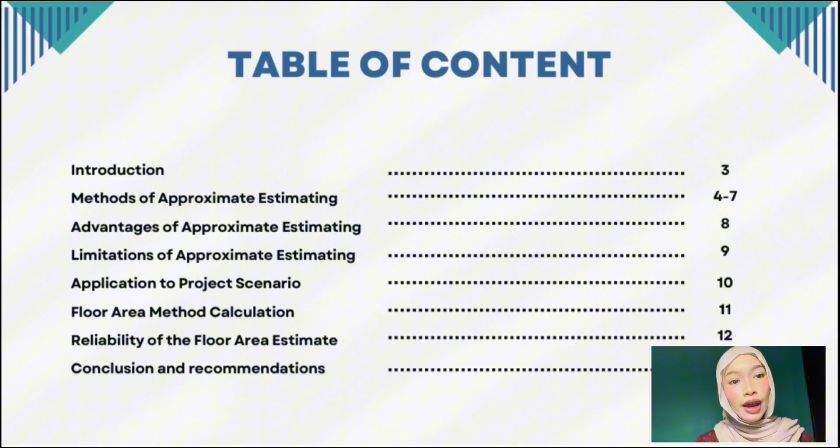Before I start my presentation, I will briefly explain the table of contents. This presentation covers the introduction, methods, advantages, and limitations of approximate estimating. And then I will explain the application to the project scenario, including the floor area method, calculation, and its reliability. Finally, I will conclude with the recommendation.

Moving on to the introduction of approximate estimating. Approximate estimating refers to the process of estimating the probable cost of a construction project during the early planning and design stage, before detailed drawings and bill of quantities or BQ are prepared. This method is based on historical cost data, standard unit rates, and similar completed projects. It helps clients and project teams to prepare an initial budget, assess project feasibility, and support cost planning and decision making.

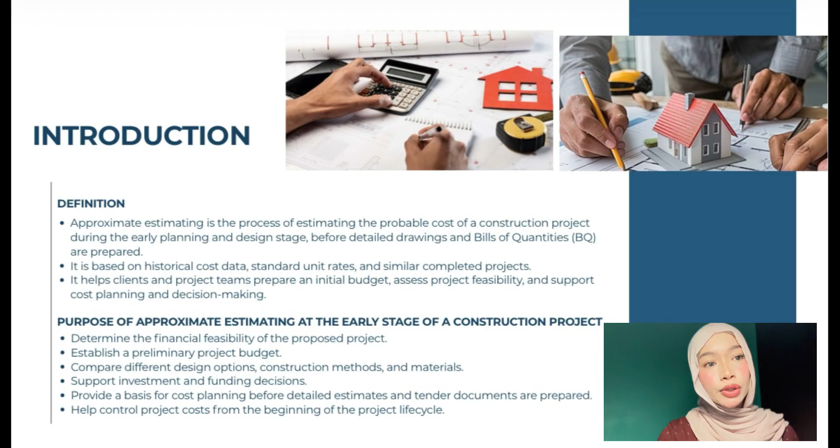The purpose of approximate estimating at the early stage of a construction project is to determine the financial feasibility of the proposed project and establish a preliminary project budget. Furthermore, it allows the comparison of different design options, construction methods, and materials. It also supports investment and funding decisions, provides a basis for cost planning before detailed estimates and tender documents are prepared, and helps control project costs from the beginning.

Following this, I will explain the methods of approximate estimating. Approximate estimating is usually carried out during the early stage of a construction project when detailed drawings and bill of quantities or BQ are not yet available. It provides a quick estimation of the probable project cost to support feasibility studies, budgeting, and decision making. There are four common methods of approximate estimating, which are the floor area method, cubic method, unit method, and storey enclosure method. Firstly, the floor area method.

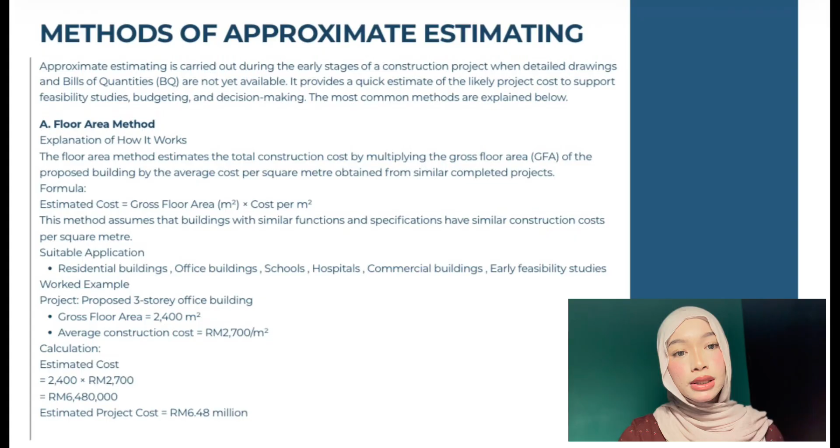This method estimates the construction cost by multiplying the gross floor area of the proposed building by the average construction cost per square meter from similar completed projects. The formula used is estimated cost equals gross floor area in square meters multiplied by cost per square meter. This method is suitable for residential buildings, office buildings, schools, hospitals, commercial buildings, and early feasibility studies. For example, a proposed 3-storey office building with a gross floor area of 2,400 square meters and average construction cost of 2,700 ringgit per square meter will have an estimated project cost of 6.48 million.

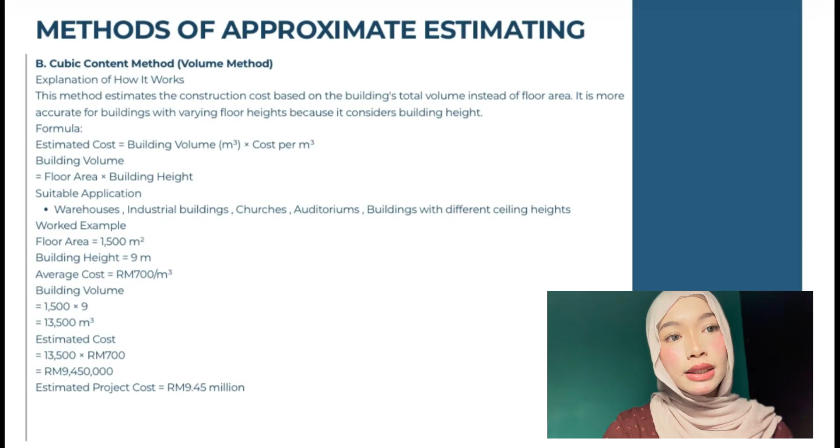Secondly, the cubic method, also known as the volume method. This method estimates the construction cost based on the total volume of the building instead of the floor area. It is more suitable for buildings with different floor heights because it considers the building height. The formula is estimated cost equals building volume in cubic meters multiplied by cost per cubic meter. This method is commonly applied for warehouses, industrial buildings, churches, auditoriums, and buildings with different ceiling heights. For example, a building with a floor area of 1,500 square meters and height of 9 meters will have a total volume of 13,500 cubic meters with an average cost of 700 ringgit per cubic meter. The estimated project cost is 9.45 million.

Thirdly, the unit method. This method estimates the project cost based on the number of functional units such as hospital beds, classrooms, hotel rooms, apartments or housing units. The formula used is estimated cost equals number of units multiplied by the cost per unit. This method is suitable for housing developments, hotels, hospitals, schools, and student hostels. For example, a proposed apartment development with 120 units and average construction cost of 280,000 ringgit per unit will have an estimated project cost of 33.6 million ringgit.

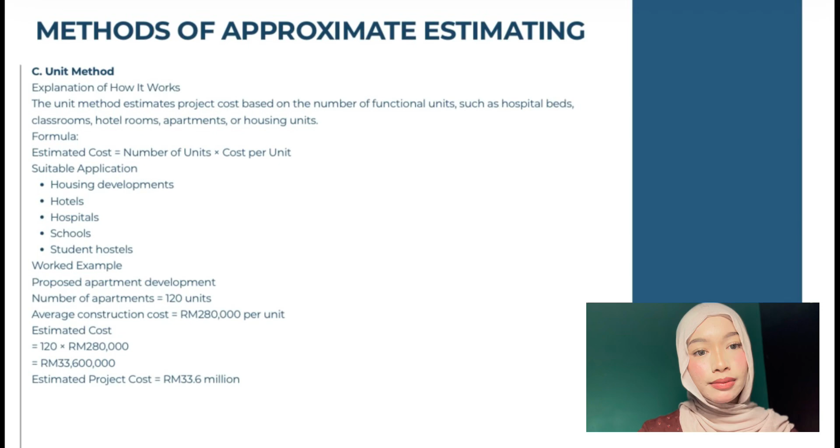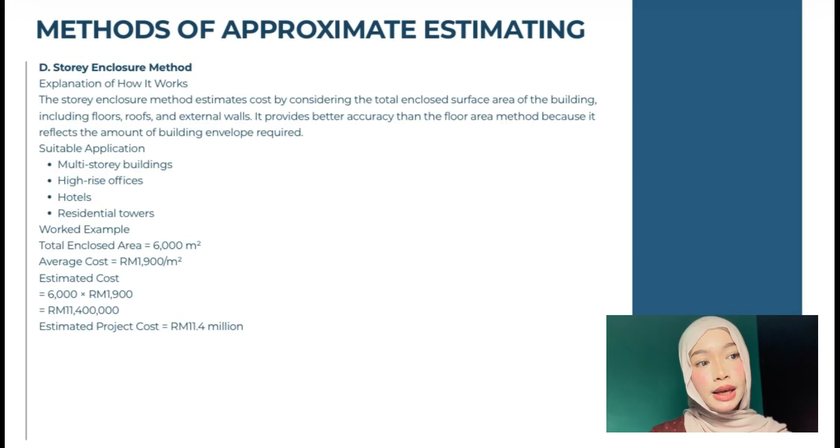Lastly, we have the storey enclosure method. This method estimates the construction cost by considering the total enclosed surface area of the building, including the floor, roof, and external walls. This method provides better accuracy compared to the floor area method because it considers the amount of building envelope required for the construction. It is suitable for multi-storey buildings, high-rise offices, hotels, and residential towers. For example, if the total enclosed area is 6,000 square meters with an average cost of 1,900 ringgit per square meter, the estimated project cost will be 11.4 million ringgit. In conclusion, each method of approximate estimating has its own application depending on the type of building, design requirements, and the level of accuracy needed.

Advantages of approximate estimating. Firstly, the floor area method. The main advantage of this method is that it's quick and simple to prepare. It only requires the total floor area of the building, making it suitable for feasibility studies and early project planning. This method also allows easy comparison of costs between similar building projects and is widely used for residential and commercial buildings.

Secondly, the cubic method. This method considers both the floor area and the building height, making it more accurate compared to the floor area method. It is suitable for buildings with different storey heights and provides better estimates for projects such as warehouses, factories, and multi-storey buildings where building volume affects construction costs. Thirdly, the unit method. The unit method is easy and fast to calculate.

It is suitable for projects with standard units such as cost per hospital bed, classroom, hotel room, or parking space. This method is useful for budgeting during the early stage because it requires only minimal project information.

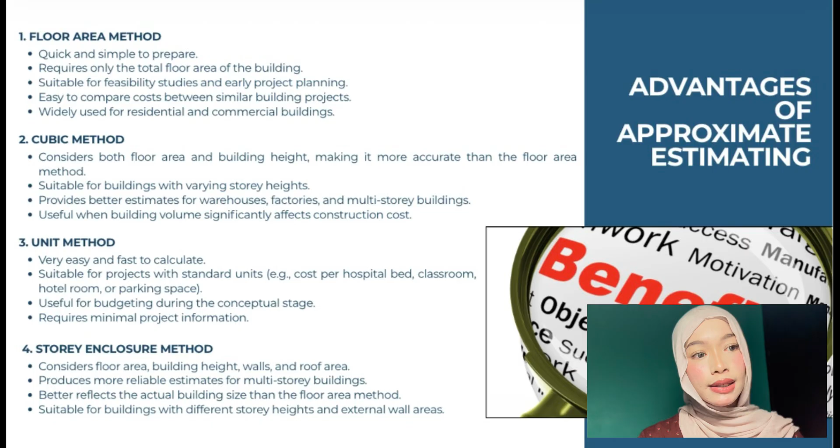Lastly, we have the story enclosure method. This method considers the floor area, building height, walls, and roof area. It provides more reliable estimates for multi-story buildings because it reflects the actual building size more accurately. It is suitable for buildings with different story heights.

Limitations of approximate estimating. For the floor area method, the main limitation is that it may become less accurate if the building design differs from similar previous projects. It does not consider differences in building height, quality, or complexity. Therefore, the accuracy depends heavily on reliable historical cost data and it is not suitable for complex or irregular building design.

For the cubic method, this method requires building volume calculation, which makes it more time-consuming. Its accuracy depends on correct measurements of building height and volume. It is also less suitable for irregular or complex buildings and requires reliable historical cost information.

For the unit method, this method does not consider differences in building design, quality, and specification. It may produce less accurate estimates for unique or non-standard projects. The reliability of this method depends on the availability of accurate unit cost data from previous projects.

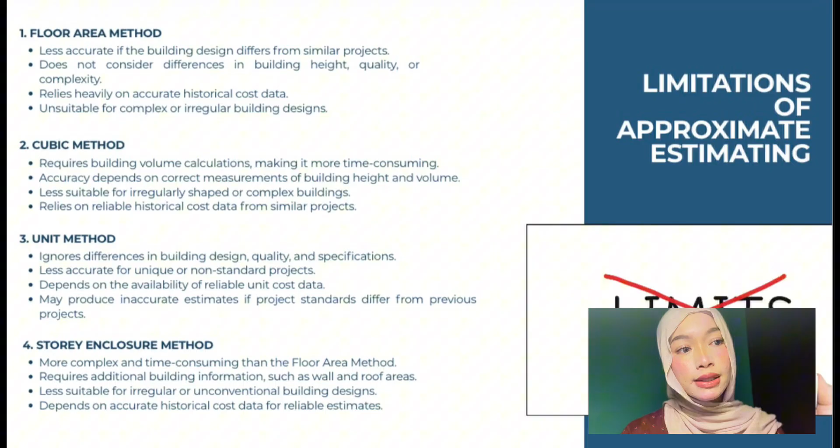For the story enclosure method, the main limitation is that it is more complex and time-consuming compared to the floor area method. It requires additional information such as wall and roof area. It is also less suitable for irregular building design and depends on accurate historical data.

Application to the project scenario: shop office development project. This project involves the construction of a two-story shop office building consisting of 4 units located at Gertak Seratus, Kuala Besut, Terengganu. The project information is used as a basis for applying the approximate estimating method to determine the preliminary construction cost during the early stage of project planning.

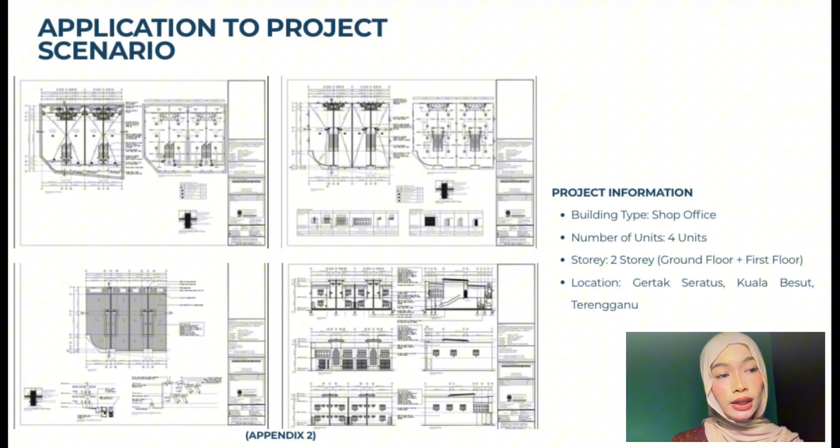This scenario demonstrates how approximate estimating methods can be applied to estimate the project cost when detailed drawings and bill of quantities or BQ are not yet available. The formula used is approximate cost equals total floor area multiplied by the rate per unit area. First, we calculate the floor area.

The building length is obtained by adding 8.200 meters, 6.096 meters, 6.096 meters and 6.096 meters, giving a total length of 26.488 meters. The building width is 21.873 meters. Therefore, the floor area for one story is 26.488 meters multiplied by 21.873 meters, which equals 579.37 square meters. Since the building has two stories, the total floor area is 1,158.74 square meters.

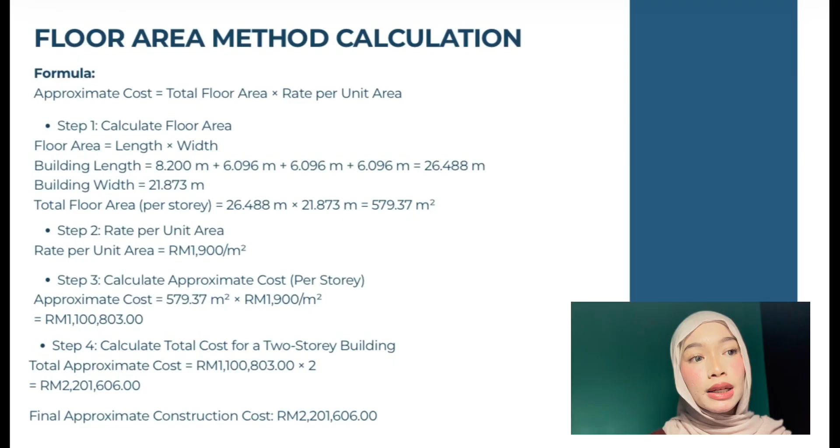Next, the rate per unit area for this estimate is 1,900 ringgit per square meter. The approximate construction cost for one story is 579.37 square meters multiplied by 1,900 ringgit per square meter, which equals 1,100,803 ringgit. Finally, the total construction cost for the two-story building is 2,201,606 ringgit. In conclusion, the estimated construction cost for this project using the floor area method is 2,201,606 ringgit.

Reliability of the floor area estimate. The reliability of the floor area method estimate is affected by several factors. First is location. Construction costs vary depending on location. Labor rates, transportation costs, and material availability can affect the total cost. Next is inflation. Increases in inflation may raise the price of materials, labor, and equipment. Outdated rates may cause the estimated cost to be lower than the actual cost.

Next, material cost. Prices of materials such as cement, steel, and concrete may change due to market conditions. Fluctuation in material prices can affect project costs. Next, labor costs. Changes in wages and skilled labor availability can influence construction expenses. Next, design and specification. The floor area method only considers building size. It does not include detailed design, finishes, complexity, or special requirements.

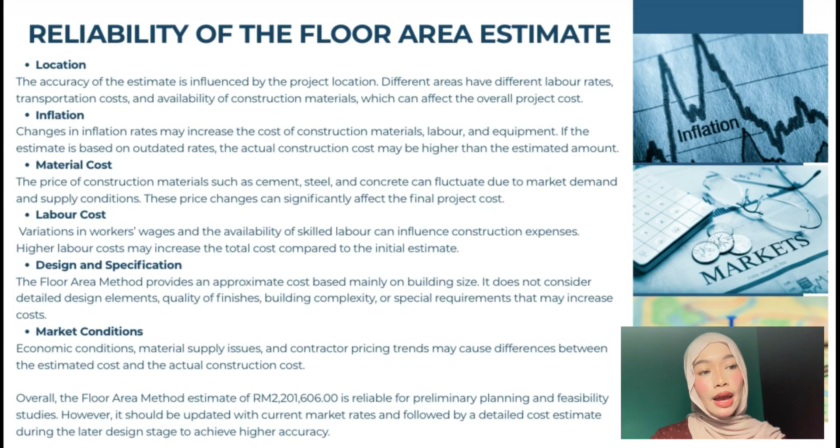Lastly, we have market conditions. Economic change, supply issues, and contractor pricing may cause differences between estimated and actual costs. To conclude, approximate estimating is used to provide an early estimate of construction project costs before detailed drawings and bill of quantities are available. The main methods include the floor area, cubic, unit, and story enclosure methods, which are useful for feasibility studies, preliminary budgeting, and comparing project costs.

For this project, the floor area method estimates the construction cost at 2,201,606 ringgit. This method is simple, quick, and suitable for the early planning stage. However, its accuracy depends on several factors such as project location, inflation, material and labor costs, market conditions, and building complexity. Therefore, approximate estimates should only be used as a guide for initial planning and not as the final project cost.

For recommendation, to improve the accuracy of cost estimation, updated construction cost data and current market rates should always be used. The estimating method should be selected based on project characteristics, while factors such as location, inflation, and material price should also be considered. In addition, a contingency allowance should be included to cover unexpected cost increases.

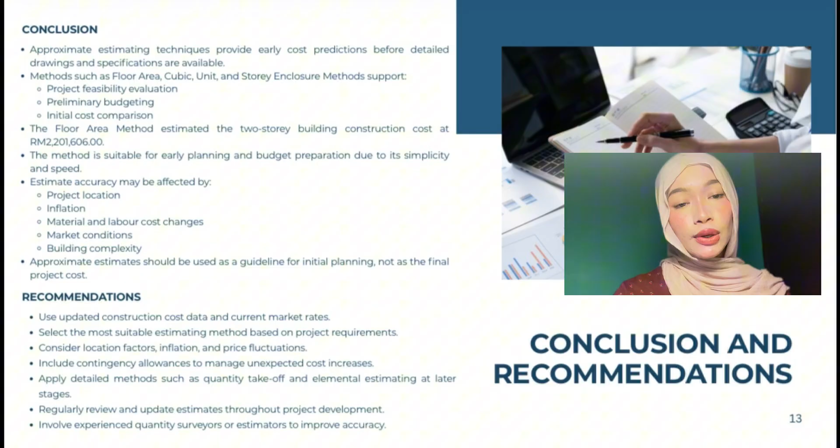As the project progresses, more detailed estimating methods such as quantity takeoff or elemental estimating should be carried out. Finally, estimates should be reviewed regularly, and experienced quantity surveyors or estimators should be involved to ensure more accurate and reliable cost estimates.